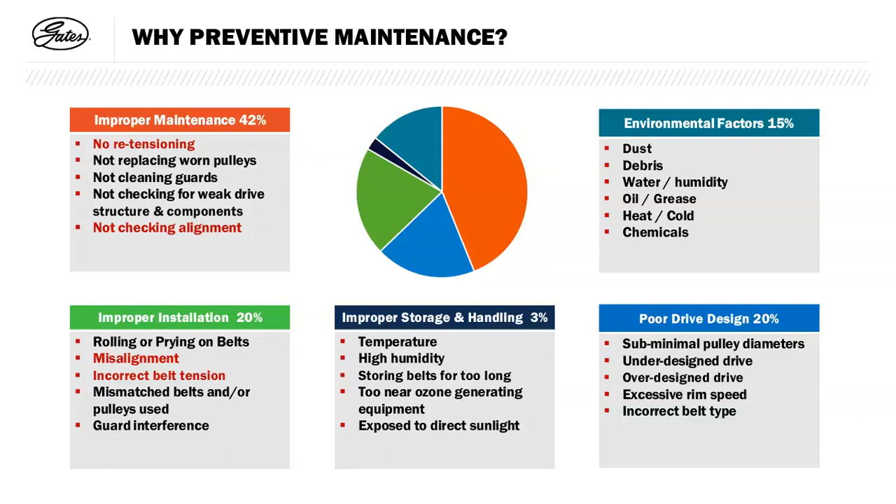Before we get into the alignment, there are some things we want to check prior. One thing that's often overlooked is the condition of the actual sprockets or drive pulleys. If you've got the appropriate equipment there or visuals to have a look at them, I suggest it's a great thing to do. Also, clean up the shaft with a bit of emery cloth and some lubrication, so when you're setting up the alignment, the pulleys slide freely on your shafts.

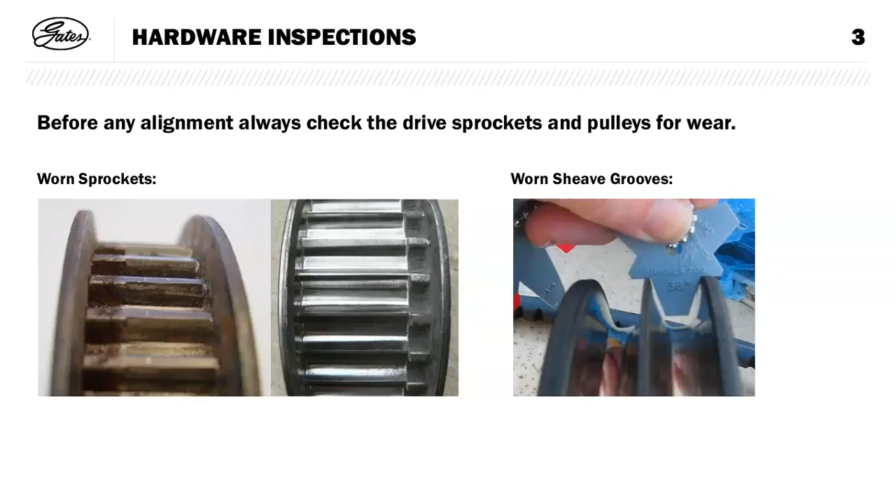Accurate drive alignment is fundamentally important. Proper drive alignment is often overlooked. Drive misalignment reduces your belt life and reliability significantly, loads the belt tensile cords unevenly, accelerates V-belt and synchronous belt tooth wear, may result in early V-belt turnover, increases synchronous belt tracking forces, and increases synchronous belt noise level significantly. I think most of you have been around and would recognise all those issues that you face in drives.

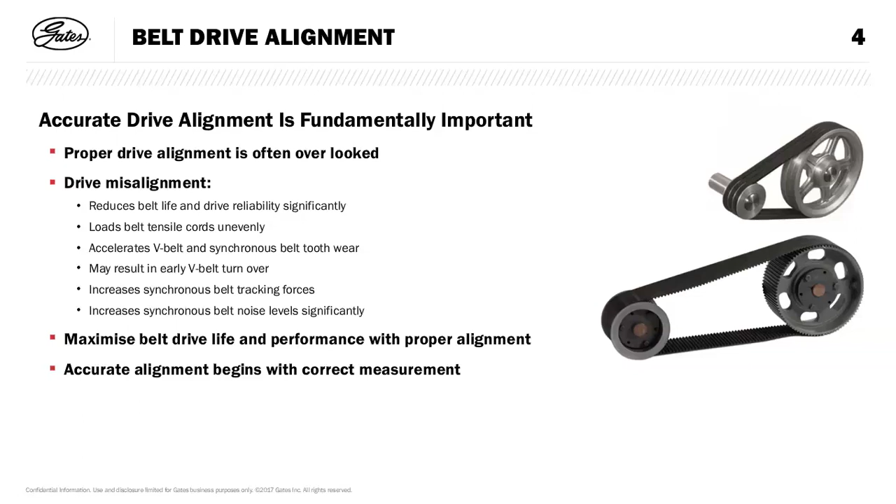So maximise belt life and performance with proper belt alignment. Accurate alignments begin with the correct measurements, so we'll start off with that - traditional ways of checking the alignment.

I think we're all familiar with the straight edge and a piece of string. One of the golden rules is trying to get 4-point contact for proper alignment. As you can see there with the straight edge, it's a bit offset - you only really have 2 points of contact. And with the string, although you've got 3 points of contact, you've still got incorrect alignment. Throughout this, you'll see that although it's a proven method of alignment if done correctly, it's mostly not the most accurate when we get down to it.

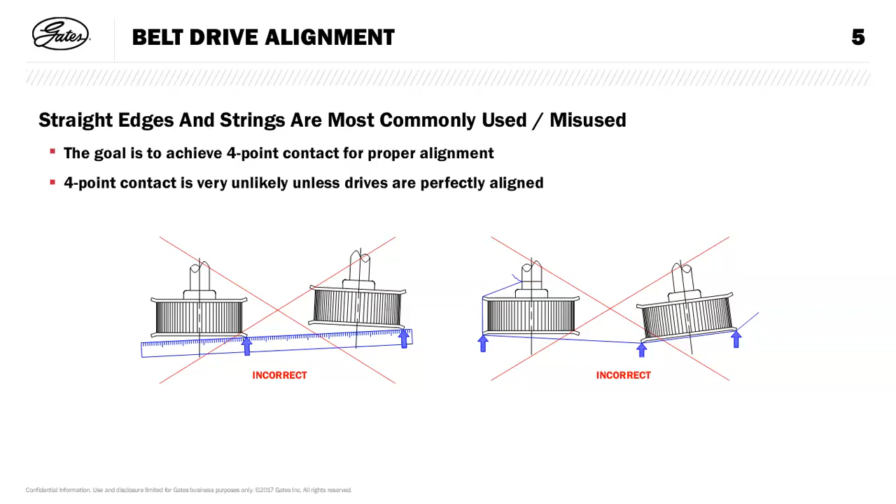Pardon my dog. Proper use of the straight edge and string - you use the straight edges and strings to project the plane of one pulley to the other. On the left-hand side, you've got the straight edge flush on one, bringing the other pulley into parallel from that area. The same with the string - you've got 2 points of contact, bringing your other pulley in to get your 4 points of contact. As you can see, we've got about a quarter degree, or 1.58 per 300 millimetres, and half a degree on a V-belt, 2.54 per 300 - we've converted from imperial to metric there.

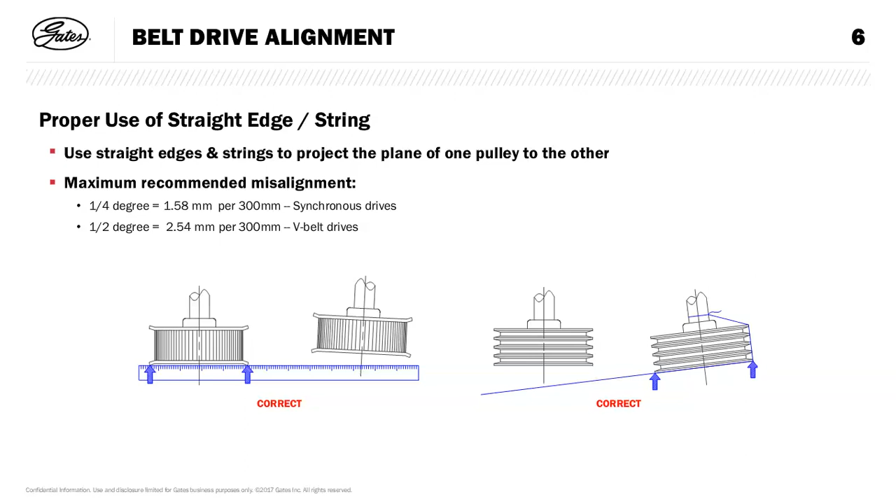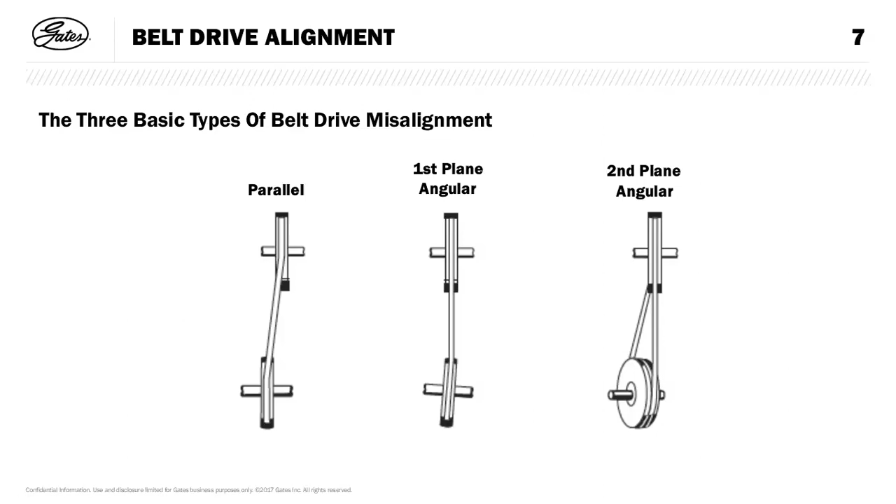Okay, the three basic types of belt drive misalignment: the parallel, which is most probably the most common one; the first plane angular, where you've just got one slightly off parallel; then the second plane, where you've got off-plane parallel and a few other issues going on, which basically means your motor needs shimming to a degree.

Now, Gates have the EZ Align tool.

It indicates all three types of belt drive misalignment. It's accurate and easy to read. It uses the laser reflections and multiplies the angle of misalignment error by 2 times.

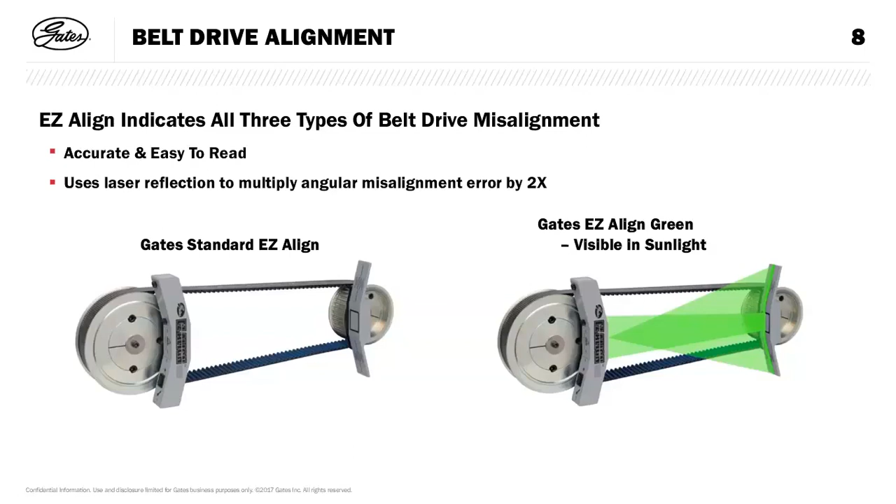The standard procedure on that, if you can see there, it's obviously got a mirror that's reflecting back into the other tool.

Just to elaborate a bit more on that, we obviously have the transmitter. That is placed on the stationary drive pulley sprocket, and the reflector is placed on the movable motor sheave sprocket. So we use the 3M principle on that, which is mirror, motor, movable. That allows you, obviously on the motor side of things...

Bear with me. Sorry, I've got the council cutting the grass next door and the dog is reacting.

The alignment sheaves, basically if you stand behind the motor, you get a better view of the actual drive itself, where you can actually look at the reflection coming back at you, and that will give you alignment off the other tool on the other pulley.

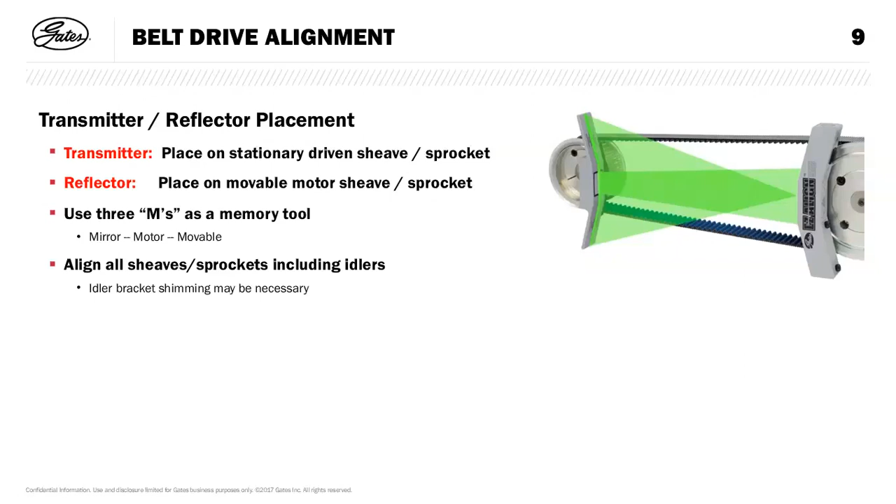This also includes the alignment of all sheave sprockets, including idlers, as they obviously would be considered, or you might require shimming those in that application.

The straight edge centre lines on the transmitter and reflector, as you can see with the little article on the left there, with the line going straight down the middle, that's obviously a good alignment. That's reflected in the EZ Align tooling with the green line going down the centre of both tools. We basically got the ideal alignment for your drive.

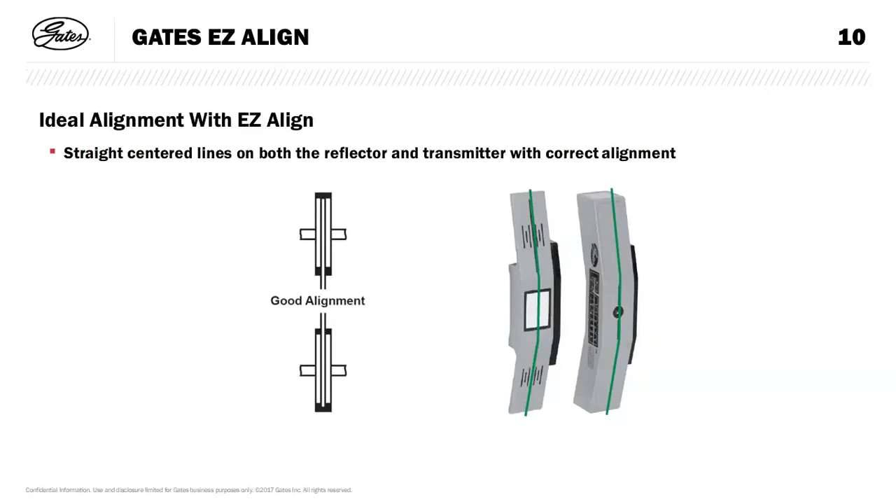On an offset, parallel misalignment, the laser lines will appear offset to the centre of the reflector, but not the transmitter. So as you can see there, that's your standard for parallel shafts, but they're not aligned and slightly running out of centres.

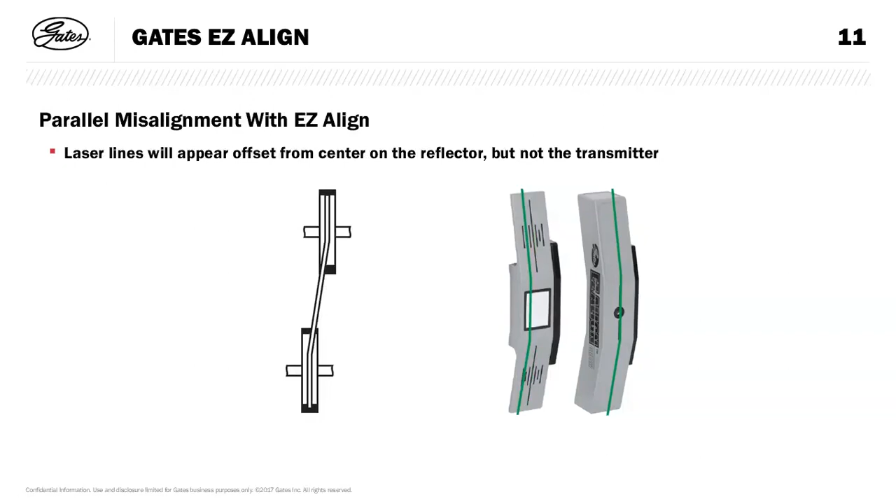The angular misalignment with the EZ Align tool. You can see there that the parallel of the shafts are not running parallel, so you've got one slightly off centre and slightly tilted to the side off the centre line.

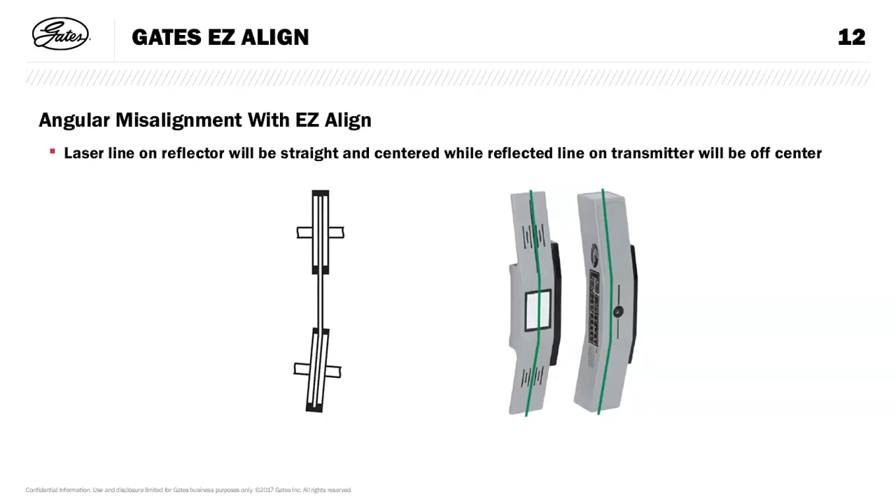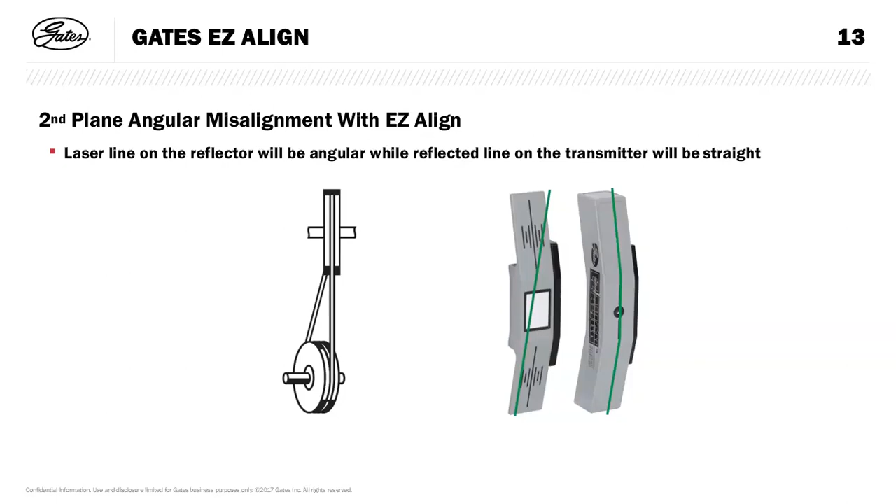Second plane angular misalignment with the EZ Align. You notice there that, if you've been around, you'll know that the motor is obviously twisted to the left, giving it incorrect parallel, but also it's shimmed incorrectly where it needs to be brought into the same height. So that's creating that twisting effect. I think we've all seen those in our time.

Correcting the real world of misalignment. What we have to do firstly is obviously correct the second plane angular. With the indications there, we talked about the motor requiring shimming, and you can see from the actual diagram there that shimming the motor will obviously bring those pulleys back into some sort of parallel.

Then you're correcting your angular misalignment, so the motor angle by the twin screws. That's actually adjusting your motor alignment with your motor bolts or screws to adjust those in or out, pulling it back into parallel to get the shafts running parallel. Then the final correction is parallel misalignment, obviously adjusting your pulleys on the shafts.

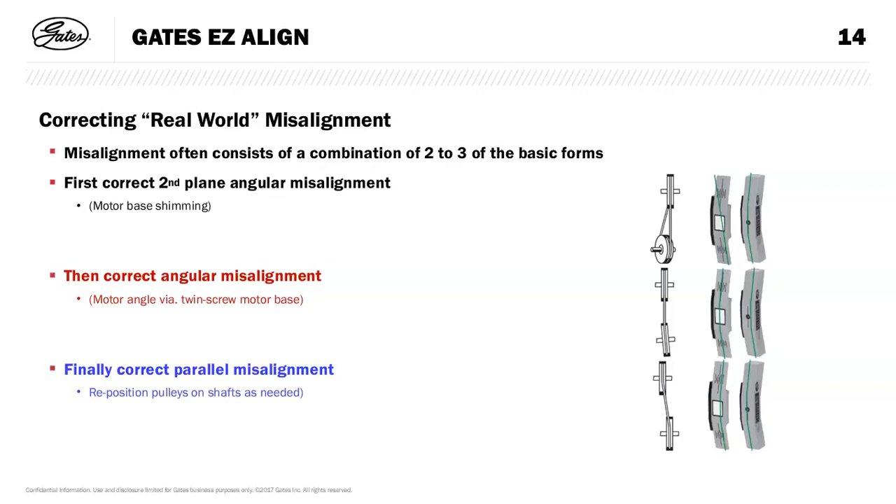Detecting and correcting misalignment. Obviously, this is started off with the belts off. So first, as mentioned before, we mount the sheaves, sprockets loosely on the shafts, apply the EZ Align tool, correct the second plane as we did prior, then correct the angular misalignment, correct the parallel misalignment, place the belts on the pulleys and sprocket or sprockets, and then apply tension.

By winding it out. Then obviously reviewing the alignment as you bring the belt into tension. Obviously, this is a lot easier to do with an EZ Align tool than be it a straight edge or a piece of string.

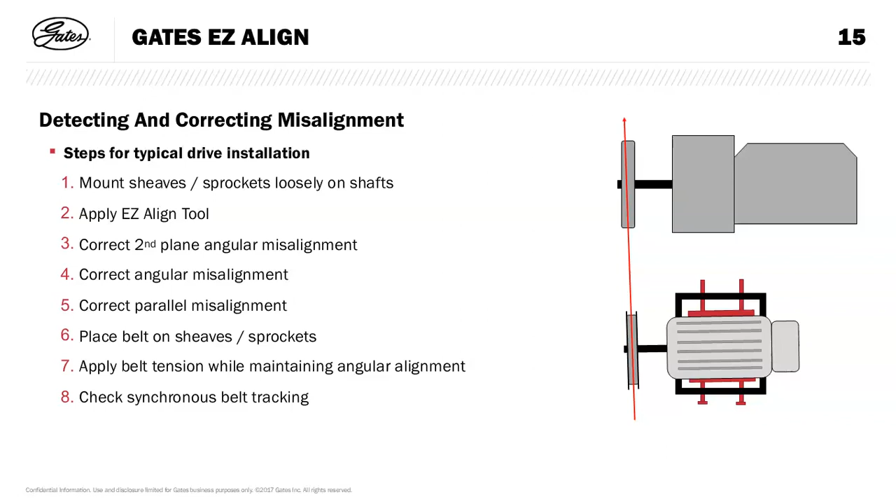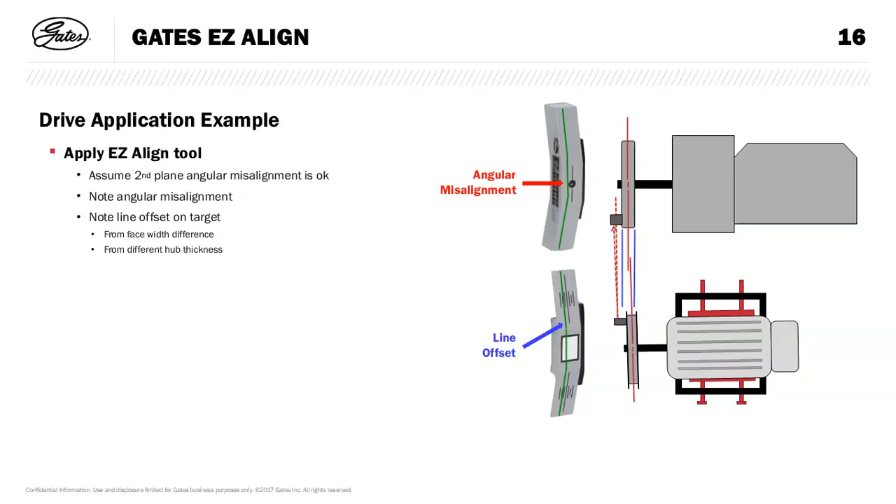Correcting that, we can jump into the next slide, and you're actually remedying this by slightly fixing the angular misalignment by twisting the motor or rearranging the motor on its bolts. And then obviously bringing your pulleys into line off the shafts.

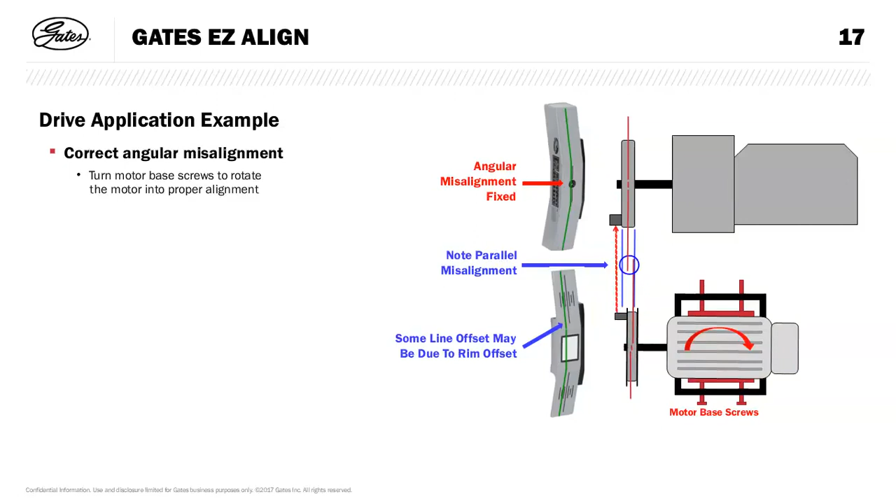Okay, the next one again, the drive application example. To correct parallel misalignment, adjust the driven pulley position. So in this case, in the red, you have parallel misalignment, which is fixed. Then we have the offset = face width diff / 2 + rim offset. So you can see there that we need to bring these lines into alignment. And on the next slide, you're actually adjusting those to where the lines are actually parallel.

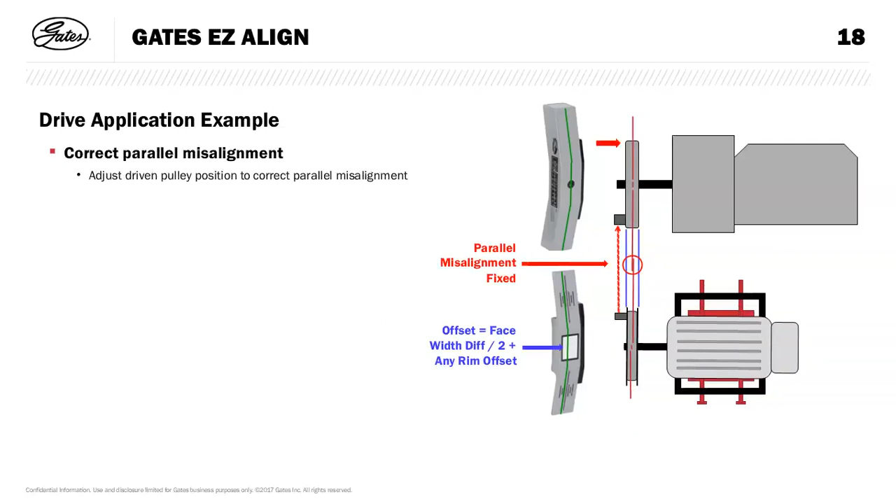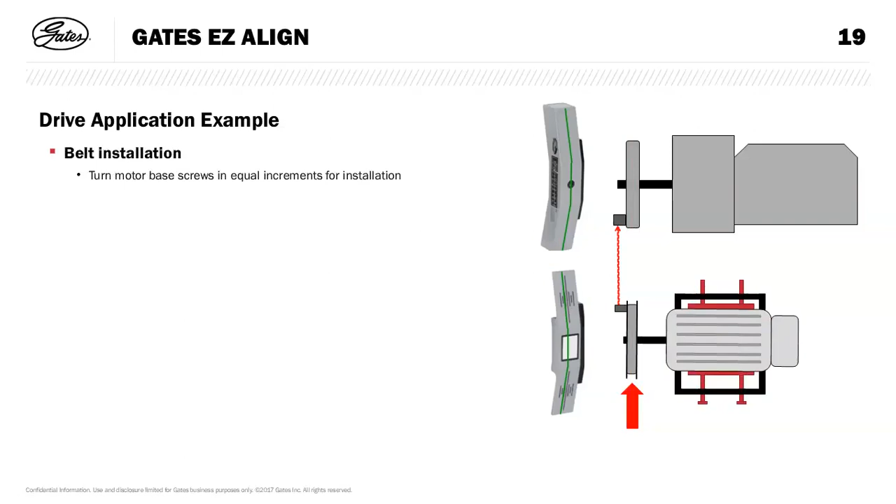Belt installation. Obviously, we turn the motor base screws in equal increments for installation. So if the motor's not skewed, you're actually trying to draw those bolts in together, so they're not going to distort any parallel on them, as per this one here. But you've got the push and the pull, which is obviously adjusting it in or out. Okay.

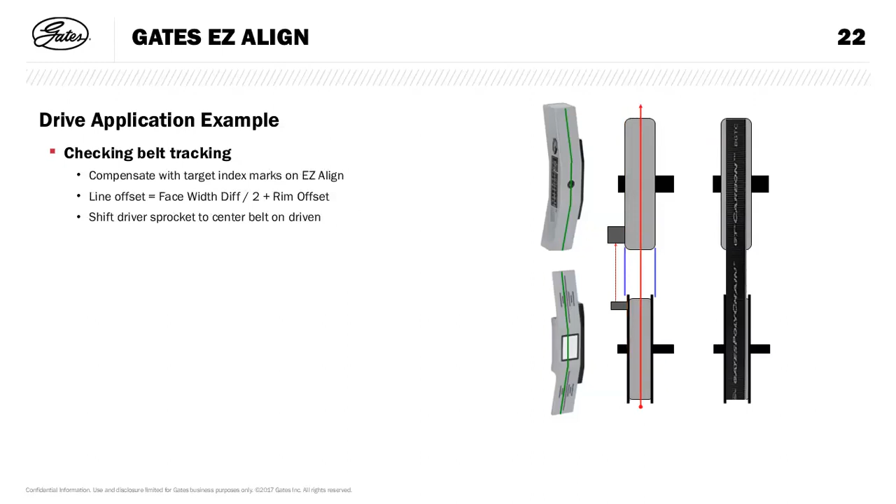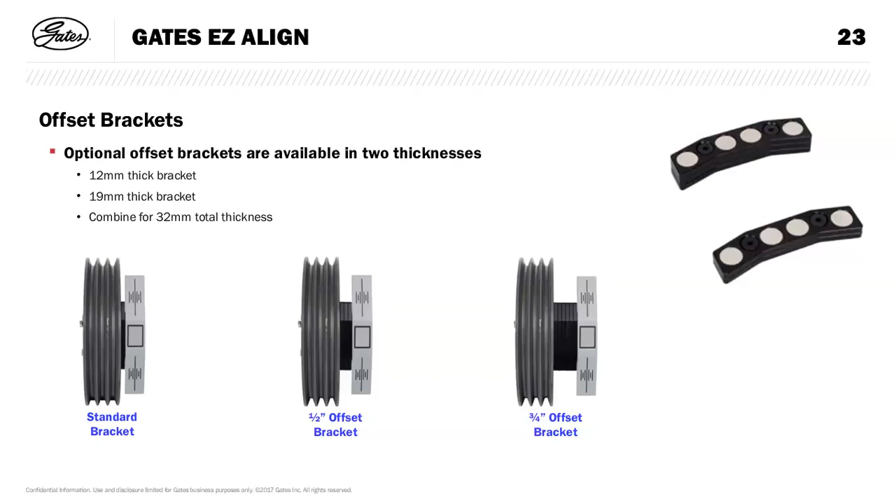As you can see there, putting the brackets on basically the hub width just allows you to have the reflectors in a position where they can get the correct readings.

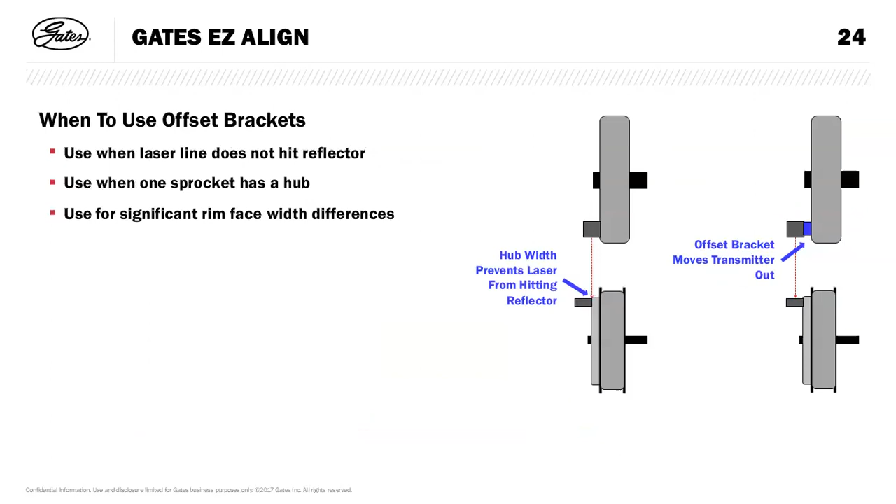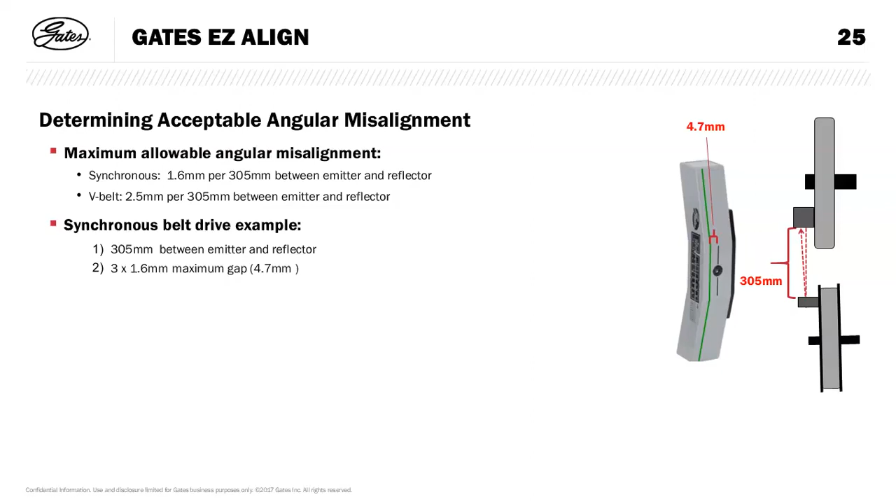So the better you have the pulleys at parallel, the more you're going to reduce the risk of tracking. Like I said before, when you're setting these up, it's ideal to wind them over, and you tend to get an idea of which way the belt is tracking. If the belt does actually wander back when you reverse it, it's most probably an ideal drive setup.

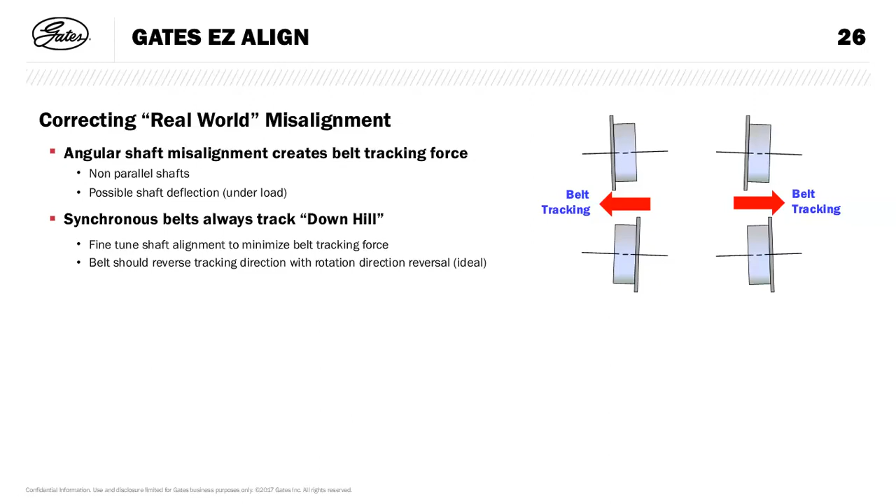Like I said to you before, ideally the courses can be run for a maximum of 12 people. It's really up to 3-4 hours. And it's really just up to you, what you want and how we can deliver them.

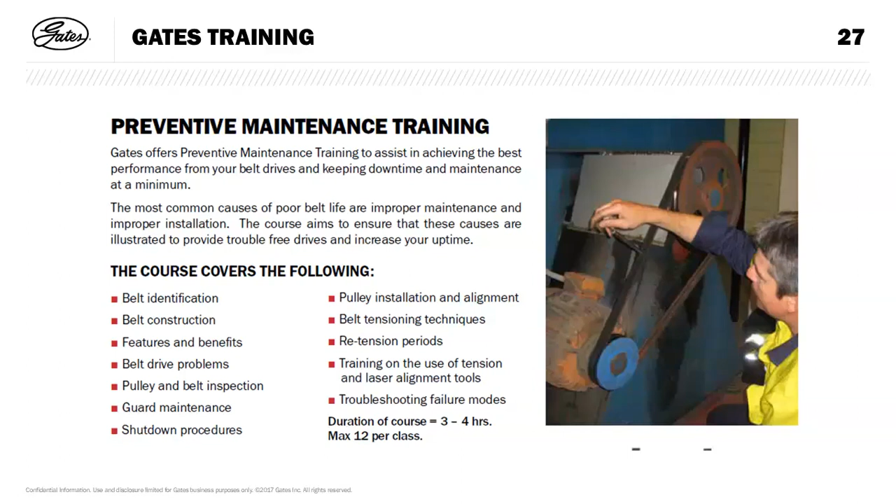Outside of the training, obviously we can support in the field with basically technical services. Quite often we're out there looking at drives, failures, can assist with laser alignments, tensionings. It's really just covering if you've got a problem drive, we can usually help you through it.